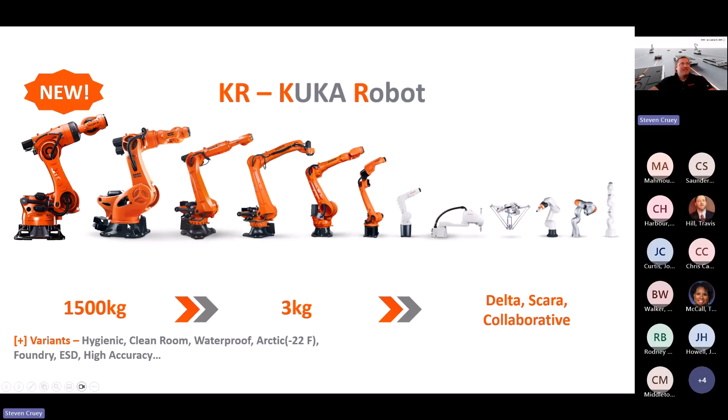And as I mentioned, we got our start with 6-axis robots, and AMRs have just complemented that as well. So we have 6-axis robots that are doing everything from brain surgery to moving cars, right? So there's one for every application.

And I always like to start with the introduction because I think, just industry wide, we've seen AGVs for 30, 40 years. I was watching How It's Made not too long ago, and it was pretty wild to see an AGV going back 40, 50 years, so they've got us up to this point, but that technology has evolved to where we can go fully autonomous.

So think about an AGV as more of like a train. It's on a track, whether it's a magnetic strip or you need optical guidance. I've seen AGVs that had a series of grids with QR codes to read in the ceiling every 4 or 5 feet. So really, on day one with an AGV, you create a maintenance task to have to integrate or maintain that solution.

So it becomes a very rigid, though it is mobile, it's more fixed like a conveyor. With an AMR, what we'll be talking about today, we're talking about autonomous mobile robots. So the same technology you see that automated cars, Tesla uses and other Waymo and other autonomous vehicles use, is the same technology that's on our AMRs.

With that, it gives you a lot of flexibility, a lot more efficiency, and the ability to adapt as you grow or change your facility or workflows. And the integration becomes a lot easier.

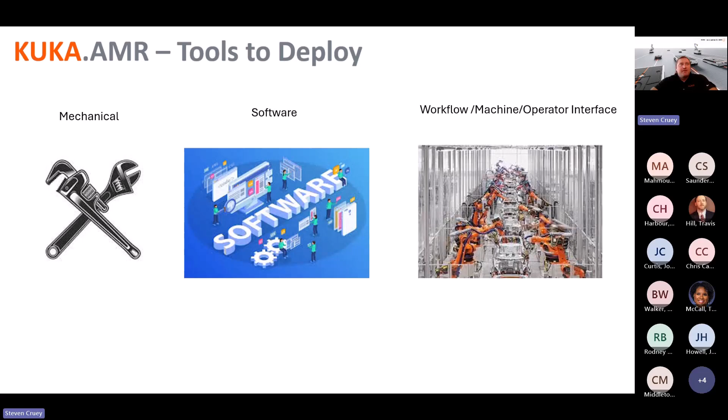So when we talk about the mechanical piece, KUKA has a standard built-in lift top, so it will go underneath and lift up. So it's an integrated lift module. So do we need to consider how we're going to pick up that pallet, or payload, or mechanical rack, right?

Do I need to outfit it with a conveyor? KUKA has power on board, so we can power a roller-driven conveyor. So we think about the ultimate flexibility. A 500-foot conveyor is always going to be 500 feet of conveyor. With an AMR, you can do your 40 by 48 pallet movement with a roller top here.

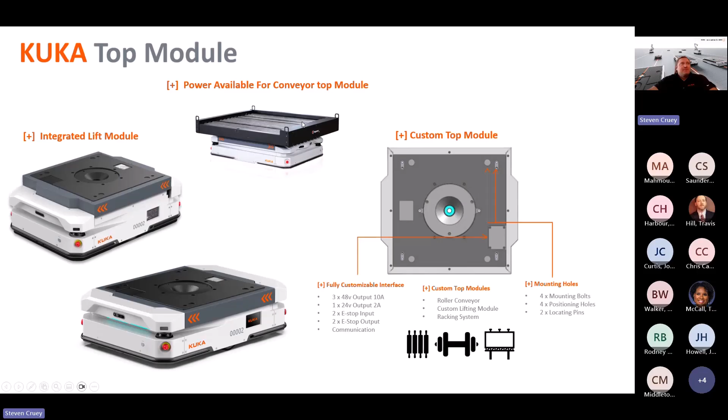Do I need to add RFID? Do I need to add any IoT devices like lights, or I've even seen those ATV whip lights for visibility? We have power on board where you can enable those things. So when we think about the mechanical side, it's how am I going to stage that product to utilize this AMR, go underneath, pick it up, or have a fixed top module where I can lift up and adapt to my flow there, my product there.

So what is an AMR fleet manager, right? I think that's what we really want to define here, what is a fleet manager? What do I need to consider when doing that integration? Because the mechanical part is mechanical, and the AMR physical part is fairly easy. You take a remote control, you drive the AMR around like an RC car, you teach it your map, you teach it your locations, and then what, right?

So really, an AMR fleet manager is a centralized software that acts as the orchestrator to an AMR fleet. Whether it's one AMR or 100 AMRs, it becomes that single source of integration to a workflow, process, or solution. So let's think about it like an air traffic controller.

When I had integrated AGVs, I had to hard code every route and every AGV and handshake. So if I had 100 AGVs, I had to integrate 100 different units. With the AMR, you have a central location like an air traffic controller where I integrate my workflow or my adaptation to my process.

Similar to an air traffic controller, if all planes were taking off and landing and reporting back to air traffic control saying 'I'm taking off now' or 'I'm landing now,' it wouldn't be very scalable. We'd have a lot of chaos. But that air traffic controller helps navigate those landings, helps with takeoffs, helps understand the weather, receiving outside information so the pilots can just focus on doing what they do best.

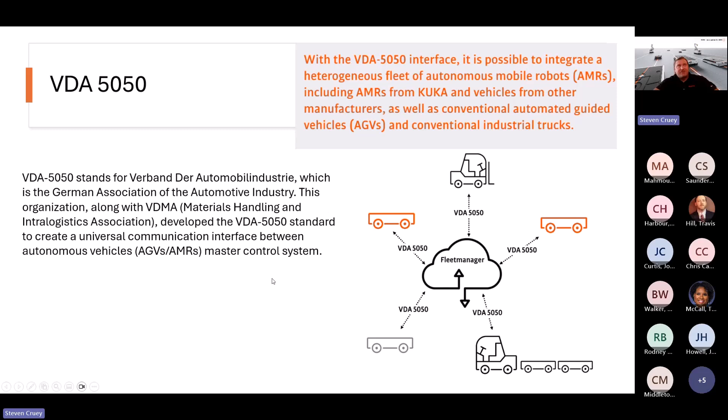But VDA 5050 was kind of created to be that centralized fleet manager. So you would remove, in this case, my fleet manager, and this middleware would be that VDA 5050 solution. So it really helps with traffic management, or if I have multiple AGV or AMR systems, it becomes that one centralized fleet, that master control system. It was the German Association of the Automotive Industry that created it, along with the Material Handling and Intralogistics Association. They developed the VDA 5050 standard to create that universal communication interface between AMRs and AGVs.

So really the goal is to create that true interoperability, so all my devices that are VDA 5050 compliant go to one central fleet manager. But what I'm still seeing in the industry, something to consider is, I still have this centralized fleet manager, but I still might need that middleware software to communicate to other systems. It just depends on the level of integration or version you get, where all the devices can be hosted on the fleet manager.

So this is what the data looks like going back and forth. Essentially, it's an MQTT broker that's receiving JSON messages via MQTT. So orders flow from the fleet manager to the AMR, it's checking the state, and then gives you that visualization within that fleet manager.

So if you don't have any questions, I'll move on to some applications. Covered quite a bit there. Perfect.

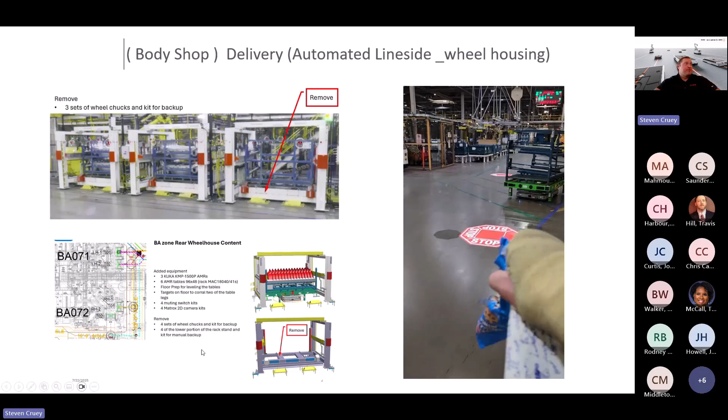6 new racks or these docking stands that it picked up from. There was a little bit of floor prep required, targets on the floor or on the racks to localize off of. And what they were actually able to remove is 4 sets of wheel chucks on the racks, and basically remove these cross braces as well. So sometimes less is more with the AMR.

I have a lot of applications where I'm pulling out a lot of these roller beds or inbound conveyance for the AMR, to make it AMR friendly.

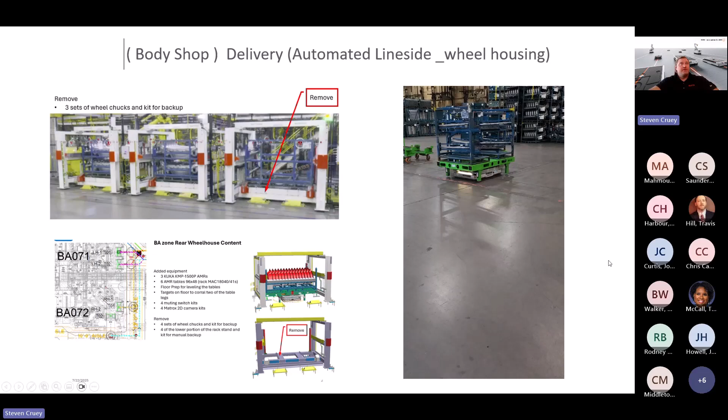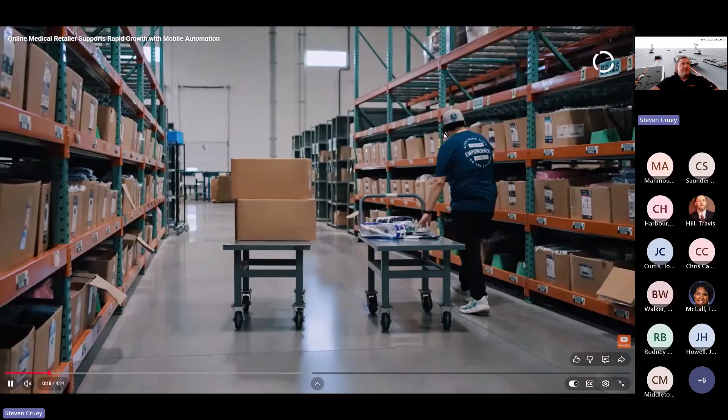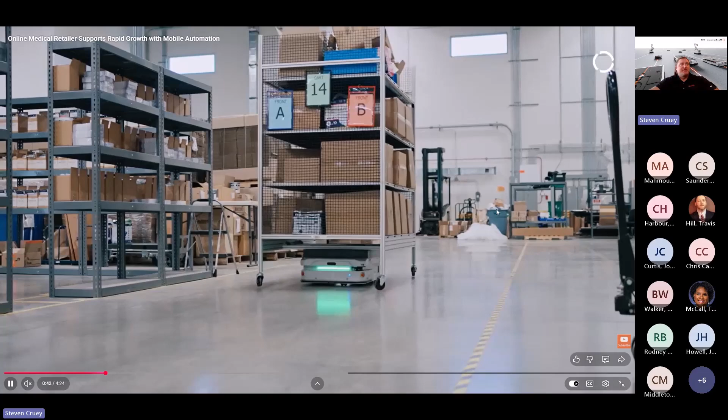So I have essentially a warehouse management system that is managing all these SKUs and all these orders from North Shore's facilities. You have a combination of voice picking and barcode readers, you have your pack out, and then you have rates to hit. So what we're doing here is providing the map, providing our location within that map so it can be exposed to the software, and basically we're receiving orders and a location to go to, so the operator can continuously pick and fulfill this order here.

This is something that a lot of folks have been trying to figure out, and I think really the power in doing this is that centralized fleet manager and being able to expose location.

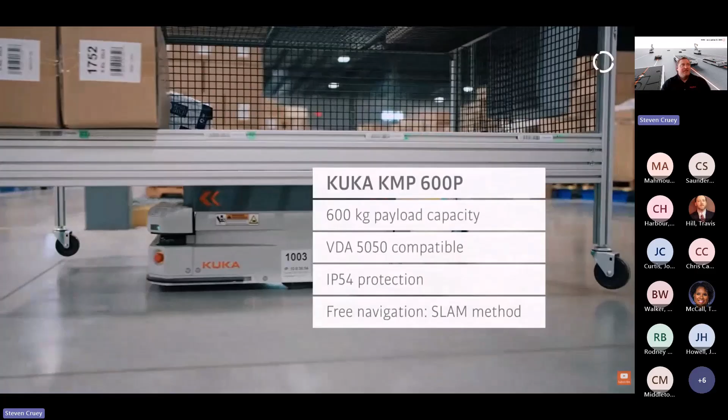So to reiterate here, operators receiving, he has his voice pick solution. So he's telling them, hey, go to location A or B, pick SKU number 1, 2, 3, or 4, this quantity. He's scanning it with his ring barcode scanner, and then that voice is also directing him where to go and what to pick, and he's filling that order there. And then we're moving along, and then we'll take it to pack out.

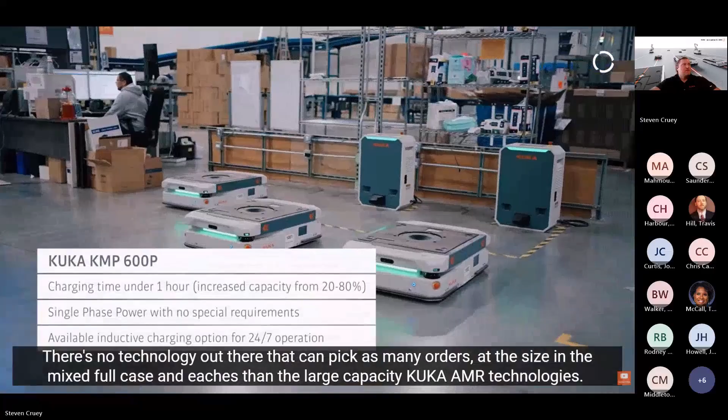So that's your mixed case picking there.

Here's another very unique application, and I think you'll start to see more of this. So robotic loading and unloading with to an AMR.

So we have this 6-axis location, 6-axis cage here. It's picking and placing the materials for this AMR to go pick up in this, I guess, little horseshoe there. So the robotic cell receives the orders, the AMR works in tandem as well to know where to go, where to load, and it starts to fulfill this pallet here.

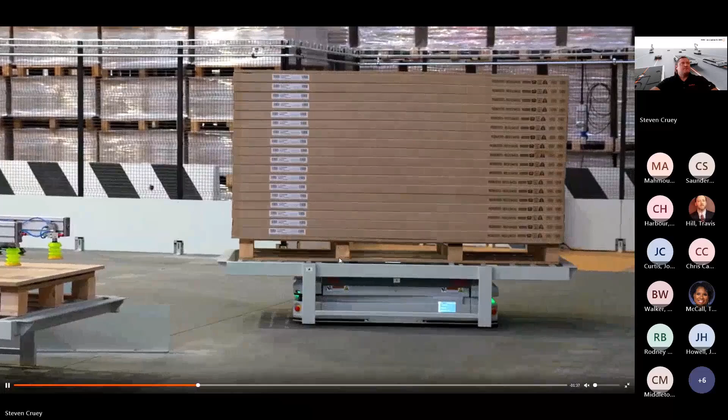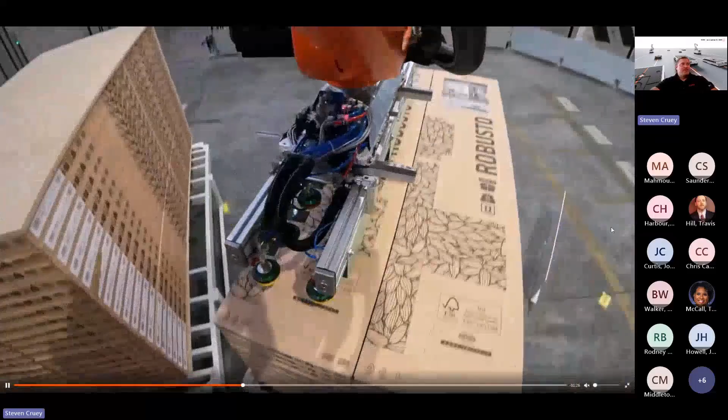So you think about the orchestration of location with the AMR, SKUs, right? So you're managing which items to pick and building out that pallet for that order to go out. But if you think about what this is doing, as opposed to a forklift operator having to go in and stage these and sort these out, or manually loading and unloading these, this is becoming more of that shuttle system to make those quick runs back and forth.

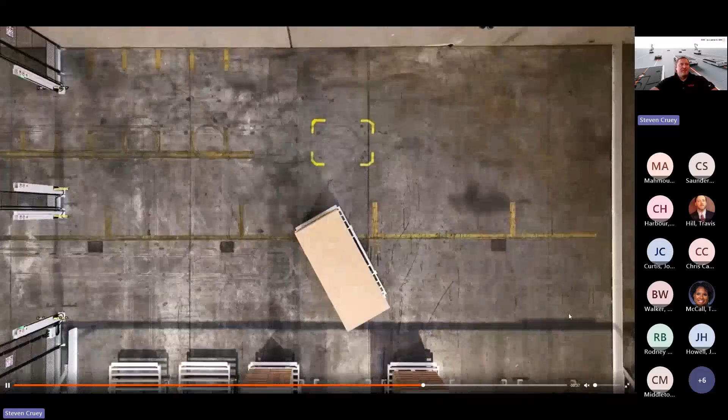We're starting to see a lot more of these concepts, especially when we think about trying to eliminate some of the non-value added tasks, like somebody pushing a cart 5 miles a day, or manually picking up and placing multiple materials all day long. How do we repurpose that operator to do something more beneficial?

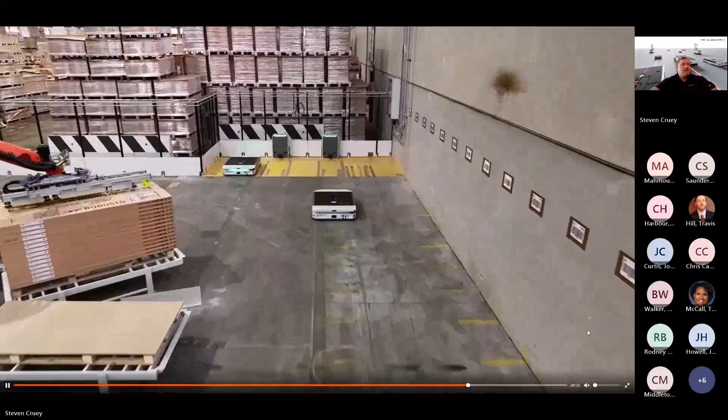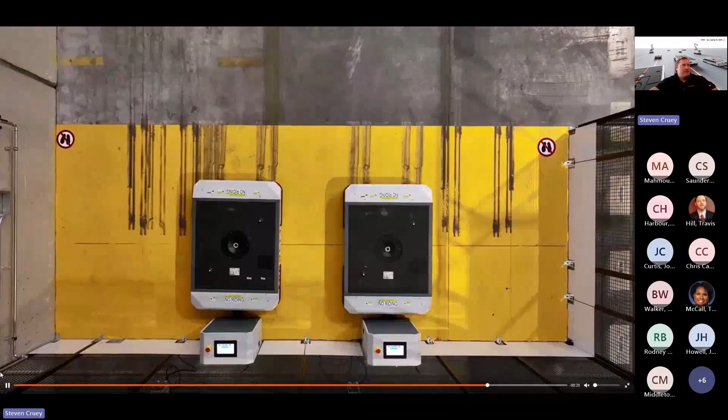And then we have our auto docking charger. I think something to really consider here is, this is a simple 3-prong 110 volt versus AGVs that have more of a flooded lead acid battery. So you're looking at sometimes 1 or 2 batteries that are $20,000-$25,000 versus a $6,000 lithium ion battery, and then a very modular charger. I'm sure we've all seen a battery farm in the back of a facility. So when you think about just the sheer power and energy savings alone, it's something to consider.

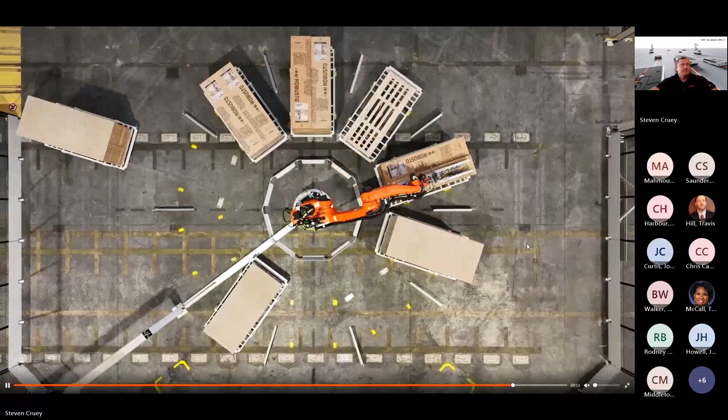And you don't have to manage your charging strategy. It's going to automatically dock. And that's all I have.

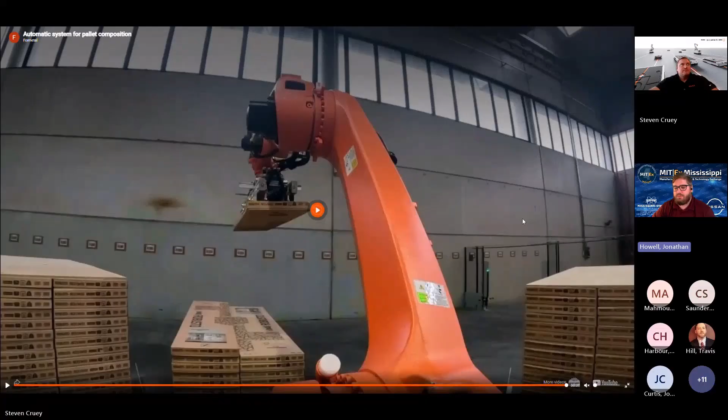And while we're doing that, I got a couple, Steven, just based off some challenges I've had. So you showed earlier the Wi-Fi requirement. I'm guessing it is required to have Wi-Fi in your facility to be able to utilize the fleet manager, which I guess makes sense because you can't have these guys attached to a cord driving around.

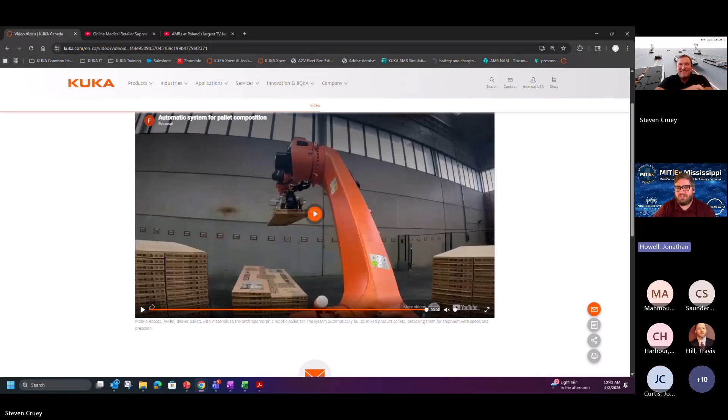Yeah. But I have a question about that. What happens if one of your units loses their Wi-Fi connectivity? Does it stop, or is it able to continue and gain it back?

So the AMR, our fleet manager is designed to complete that mission and get to a safe stopping point. So if a mission is triggered, this AMR needs to go pick up this pallet, take it from location A to location B, and drop it, and that's the completion of the mission that's set up in the system. It's going to fulfill that mission, then stop. It's not going to stop just because it loses Wi-Fi en route.

Okay, so it actually completes the mission and then gets to a safe spot to go into a holding pattern. Does it have to be manually recovered after that, or if it gains Wi-Fi back, will it auto recover? It will auto recover and pick up where you're left off.

Something to consider is, because I've seen this a lot of times, if you're staging, I wouldn't stage more than 5 to 10 missions in a fleet manager, depending on how, basically what I mean is you have SAP or warehouse management system sending triggers, and they need to be within a certain order. The more you put on the fleet manager, the more you have to backtrack on if you lose Wi-Fi or lose signal, right? It will pick up and follow orders, pick up where it's left off. But if you need to handle an exception, you don't want to dump 1,000 orders or missions into the fleet manager, right? So just something to consider.

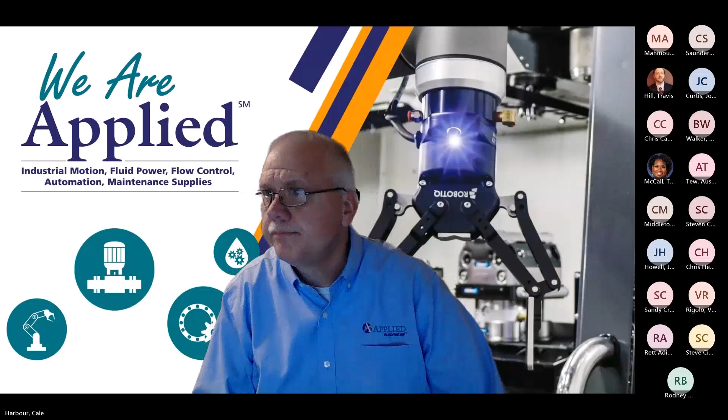So I'm part of the Applied Automation Group. ACS is one of the 6 automation distributors that make up this group. We are based out of Marietta, Georgia, and cover 8 states in the Southeast. So we've been expanding very nicely lately, and I'm glad to get a chance to talk to everyone here this morning. Specifically, what we're going to be going into is mobile Cobot integration, actually interfacing a standard 6-axis collaborative robot arm onto a mobile platform, an AMR platform, to be able to accomplish new things in a manufacturing environment we haven't been able to do before.

So that being said, before we get into it, I just kind of wanted to hit a reminder of what are some of the benefits of automation? Why do we care about automation? What is it that automation gives us? And some of these things are going to be a repeat.

The first thing that everybody typically thinks of is labor savings. If you automate a process, you free up that human labor to be able to do something else. Repeatability - you have automation set up to be able to do the same thing every time. Same process, same assembly, same force to be able to press something together, the same surface finish. It's set up to be able to produce or perform or service the same process repeatedly, over and over again, the same way, to the same standard.

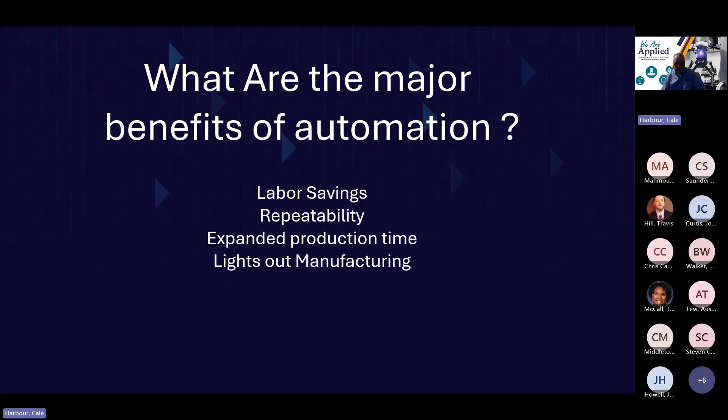We do have a customer - they have a series of machines that we're tending. They set it up with a batch of parts and go home at night. And when they come in the morning, the batch of parts are done, and they've achieved an extra 6 hours production on 6 machines without having to put any extra staff on board. So that ability to expand your production time and be able to run that lights out when no one's there is a real benefit that comes from being able to automate a process.

But because we have that repeatability that I mentioned earlier, it also enables us to reduce the scrap rather than having an inconsistency that a non-automated system might bring into it. We're doing that same thing every time. We can reduce that scrap.

We can reduce the rework. We can reduce the material that may not be able to meet quality standards, and therefore we get more product through in a shorter time with less effort.

But one of the huge important things that gets overlooked is this reallocation of human assets. We've seen this time and time again. When we can deploy automation, specifically with robotics, that ability to reallocate that human asset to something that brings more value and more return to your manufacturing environment - when that can be done, the ROI, the payback, the benefits far outweigh what the labor savings are. That ability to add to the capacity.

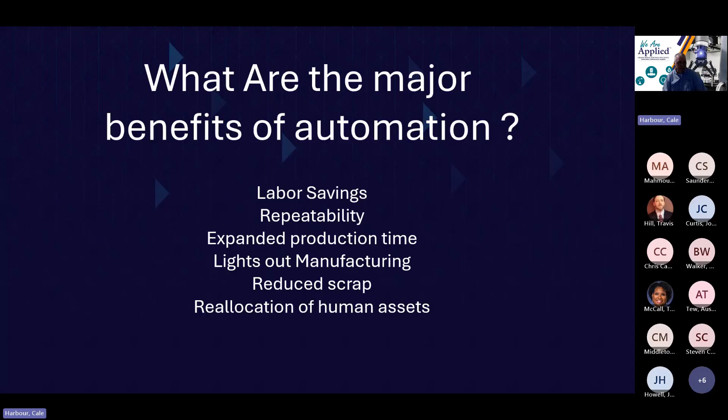That's part of the unexpected benefits of automation, the things that happen that you don't really think of or expect. It's not something that's typically predicted on a spreadsheet or an ROI calculation, but improving worker retention and morale by being able to redeploy that human asset to something that brings more value to the customer, to the employee, and to the company itself.

One example we did, this happens to be a collaborative 6-axis arm made by Universal Robots. This is an application at a life test lab. With this one, that person's job, 40 hours a week, was to raise the blind, lower the blind, open and close. And every 30 cycles, 50 cycles, they had to record, does it feel the same?

Is it getting looser? Is it getting tighter? So they're giving their human perception to how this particular blind is feeling over that test.

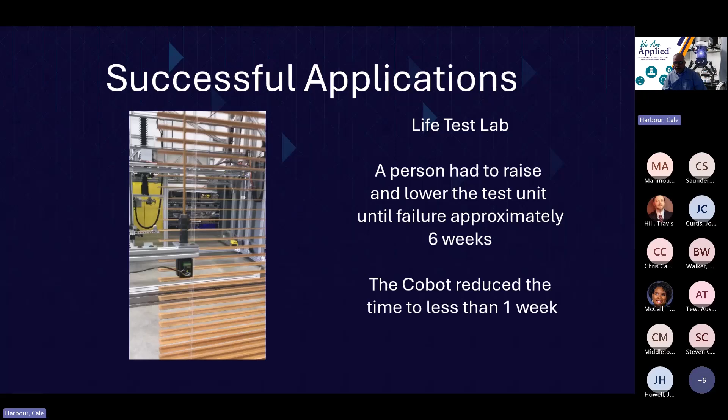And they have to do that until the blind fails. So this is usually about a 6-week test period. That person's job, 40 hours a week, 8 hours a day, is to just perform this motion - raise it, lower it, open, close - and every 50 cycles or so record whether it's changing or not. Well, that human perspective on whether it's changing is not very empirical.

And needless to say, they had a very high turnover rate in this job position. One of the benefits we had when we deployed this arm with this customer was that the employee working at this station had a high school degree, did not attend college, was not a degreed engineer, but we worked with them and trained them on how to use this technology. That employee, who showed up for work, was reliable, someone they wanted to keep, got promoted to be the robot technician.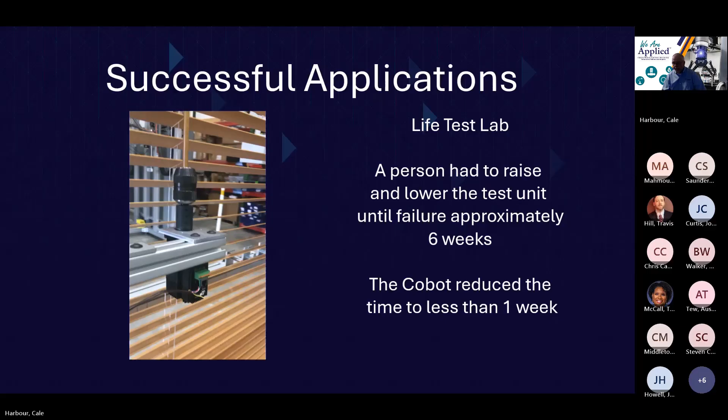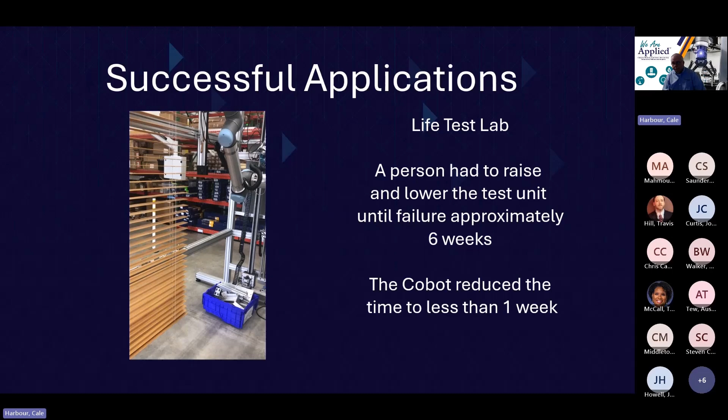They got a pay raise. They were able to retain that employee, which means they didn't have to go through rehire and training. With this technology in place, it could run 24 hours a day, through lunches, overnight, and because of the force sensors in it, they were able to get real-world data on the actual amount of torque it was taking to raise and lower this blind, which they could do more specific analysis with.

One of the other things that happened is they could now complete an entire test in 3 or 4 days. They were able to get 6 to 8 units tested in the same period of time that it took for one previously. They then added a second robot, and that one person was able to be the robot technician for both cells, setting up from one test to the next.

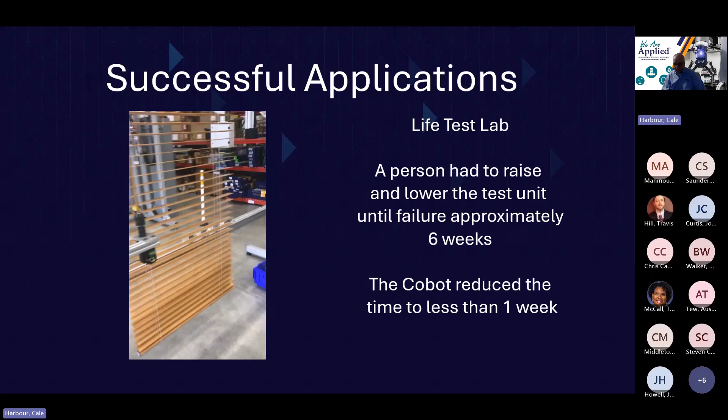Keeping that employee, someone who showed up when they were supposed to, and being able to achieve the cycle test that much faster far outweighed all the other benefits they got out of this. But in addition, they also got better data coming out of it.

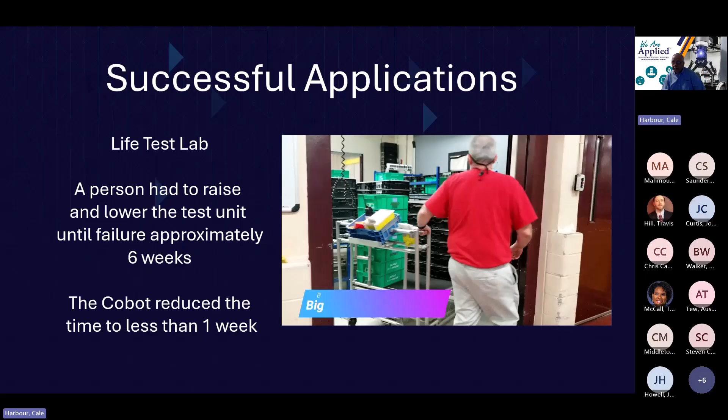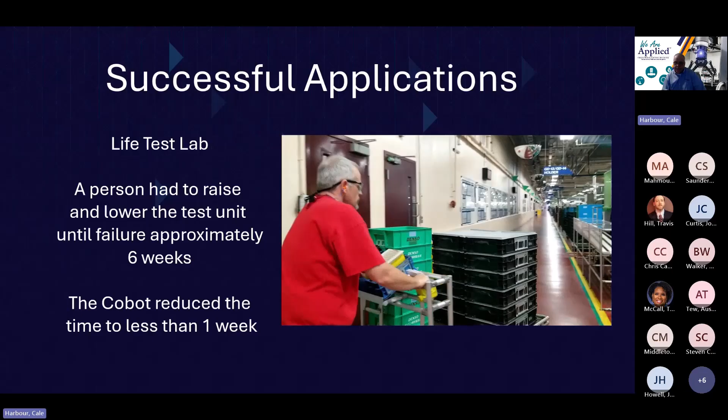Another scenario we did, this was a different customer, involving a mobile robot platform - we're working with Mobile Industrial Robots. This is another area we had where, in this particular case, they had a team of people on every shift, 3 shifts a day, anywhere between 8 to 12, that were walking 8 to 10 miles a day just to deliver material line side.

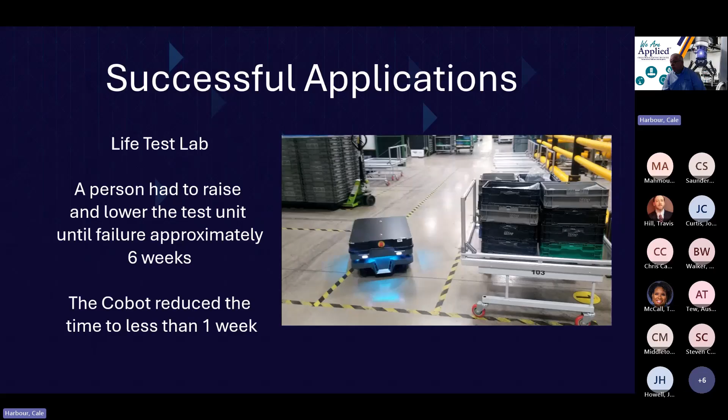We were able to work with them and add an IoT appliance, that middleware between their MES warehouse software system and the mobile robot fleet, to work with the lines so that when they called for material, we knew where the parts were staged and were able to engage those carts and deliver the parts to the production line.

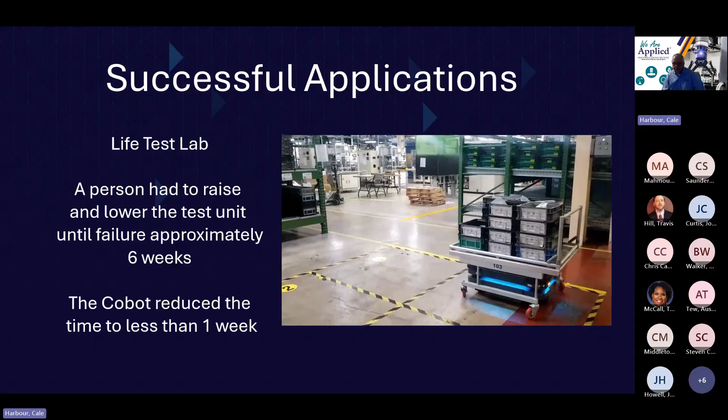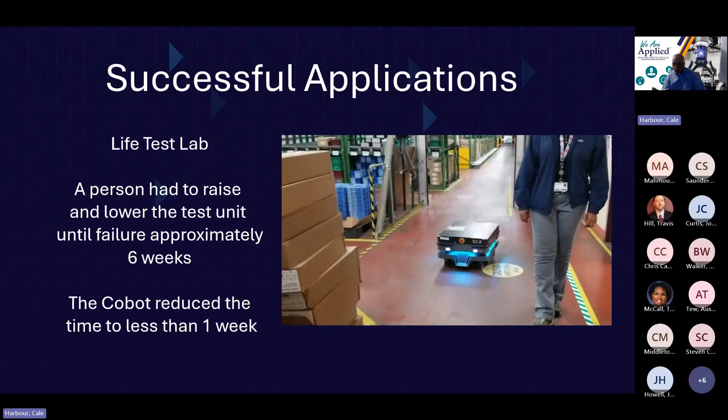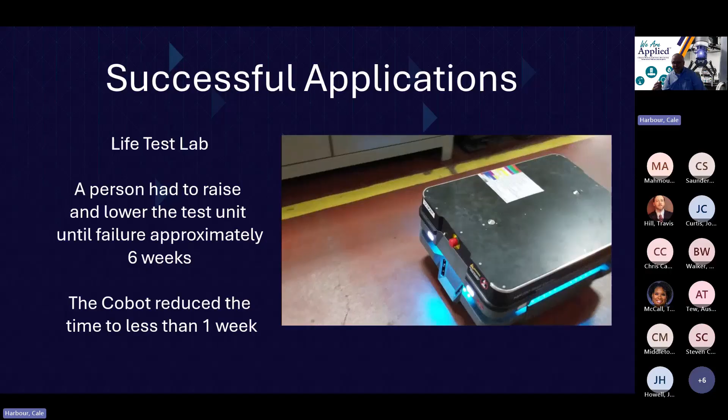In this particular case, we freed up between 8 to 12 people per shift, 3 shifts a day, to perform higher level tasks, things that human beings could do better than just pushing a cart around. We're able to deploy it in a safe environment to deal with obstacles, move around barriers, and notice where people are so it can get around safely and still accomplish its mission to keep the parts fed to the production line.

So with these 2 technologies, these are 2 great case stories about how we were really able to add not only the value that it brought to the production line, but those unexpected values of reallocating that human asset to do something higher level, to do something that brought additional value.

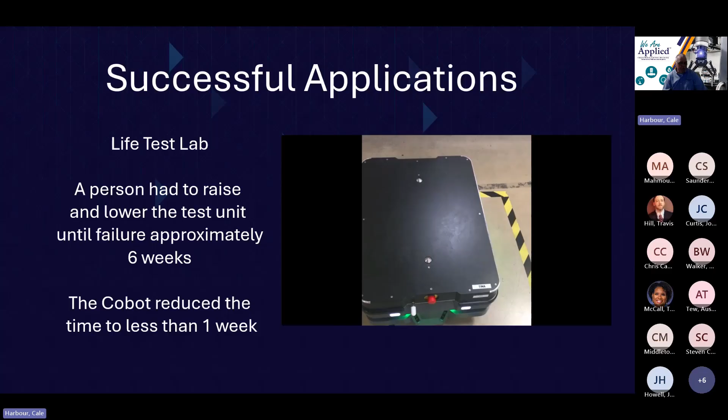But what happens when you combine those technologies together into a mobile cobot platform? In this scenario, this is that 6-axis collaborative arm on top of an AMR, which is also collaborative, able to sense the things around it and be safe in its environment around people, and put them together to solve a task or a mission or a set of needs that's on the manufacturing floor.

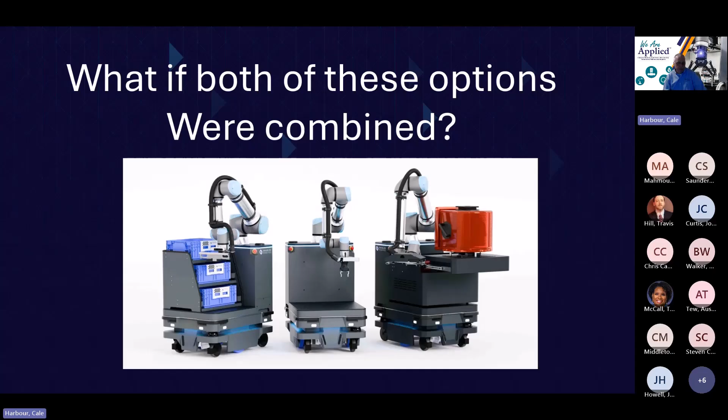Now, what exactly is a mobile cobot? A mobile cobot is combined of 3 different pieces. One is the actual collaborative arm, in this case a Universal Robot, and an AMR, a Mobile Industrial Robot, but we combine it together with a platform that ties the two together.

And when I mention the word we tie them together, it's more than just the mechanical connections. In addition to that, the software is also combined so that all of the commands for the 6-axis arm and all of the commands for the mobile platform are in one common, easy to use interface.

We're still able to talk to the fleet software. We're still able to talk to the middleware to give us access into the SAP system, ERP, warehouse management system. But it makes it simpler and easier to deploy by having just the one interface to work with and combine these together.

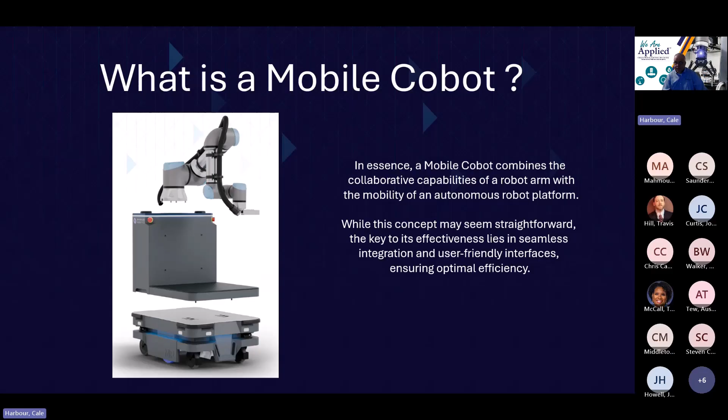So what can you do with a mobile cobot? Again, they can run 24 hours a day. They can run through no lunch breaks, no putting on of PPE, no PPE purchases for it. It's able to just run.

Once it's programmed, you don't have to do additional training. It's going to provide that repeatability to do the same process every time. Now, we can make the mission with the right decisions, the right statements to choose - if this is not ready, then do that type of scenario - but it's going to do it repeatedly, reliably, and predictably.

With this, we're able to communicate with all of the existing equipment on the floor, either directly or through a middleware setup. And we can provide those logs to say how many missions did we complete, how many parts did we deliver.

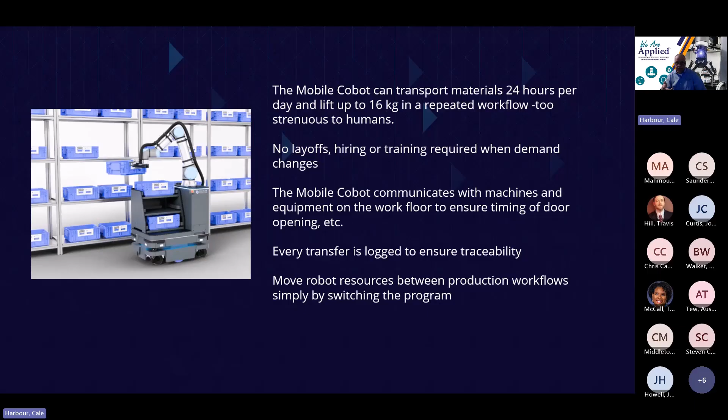In the case of this particular scenario that we have here, we have a particular cobot with shelves on it, picking up bins of parts to take to the warehouse to get refilled, or to bring parts to the line and put it on a particular workstation.

This environment can also, because of the flexibility, if we're not dealing with a set of shelves, we're putting things into the rack of the machine to keep it fed. We're able to do that as well.

But we're able to work in the environment because of the mapping and the localization that we have. Most environments require just minimal modifications for us to be able to work in, and we'll get into some of those examples here in just a second.

But this is also a technology that can be gradually phased in. If there's a potential to do 10 of these in an area, it's not an all or nothing scenario. We can start with one, get it in place, get the employees on the floor familiar with the technology of seeing it run around, work out the details of the communications, and then expand as you go.

So as your workflows change, you're able to easily adapt that. Again, through the fleet interface, we can make that change and have it go to all robots simultaneously. So if a workflow or work path does change, we're able to easily adapt to it and be less sensitive to those changes.

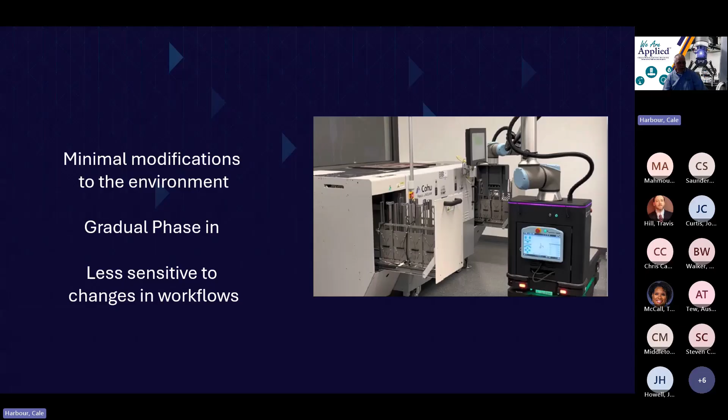Just as a quick reminder, what is the difference in an AMR? An AMR is an autonomous mobile robot. In the last 30, 40 years, we've seen AGV technology. AGV typically follows a magnetic rail, a wire embedded in the floor, or could be QR codes in the ceiling, but it provides something that it has to interact with to follow a path. And if something blocks that path, it's not able to go around it. It has to follow its line.

But when we take this AMR technology and add it to a 6-axis arm to turn it into a mobile cobot, there's some additional things we have to consider, and they're fairly basic, they're straightforward. When we add that 6-axis arm and combine it with this platform, what's the reach we need to achieve? Can we reach from the lowest point to the highest point that we need to be able to achieve the mission, to achieve the task at hand?

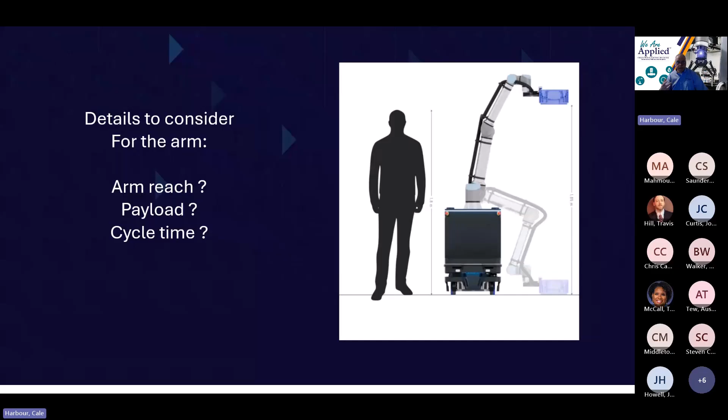As the robot is moving, it's keeping safety first above everything else. Now, obviously, we can work with the speeds, we can optimize it, but as obstacles come in the way, as pedestrians get in front of it, or a box were to fall off and get left in the aisle that we have to navigate around, all that takes time. So we have to know what the cycle time for an application is to make sure we can achieve what we need to, or do we need more than one robot to be able to achieve it? So those are some of the basic things that we need to consider for the arm.

For the AMR, things such as the aisle width. Is the aisleway wide enough to allow the robot to move down it? Or if we need multiple robots, can two pass each other to get from the warehouse to the workstation, for example? How are we going to start the mission?

We're going to talk about this in another slide in a moment, but think about how you want the operator to interface with this system. Is it a push button? Is it an automatic call from a PLC? Is it going to be a custom dashboard? We'll get into that momentarily.

The fleet management, being able to keep up with multiple AMRs within a facility and be able to manage them for emergency egress, charging stations, map sharing, mission allocation. All of that still has to happen, and we have to consider how we want that to behave as we're deploying.

The traffic flow - this is one I think sometimes can get overlooked. When we began working with this technology almost 10 years ago, we had customers misunderstand what collaborative means. Collaborative on the AMR and the arm itself, we are capable, provided the risk assessment is done and the application meets the requirements, of working next to human beings without a problem.

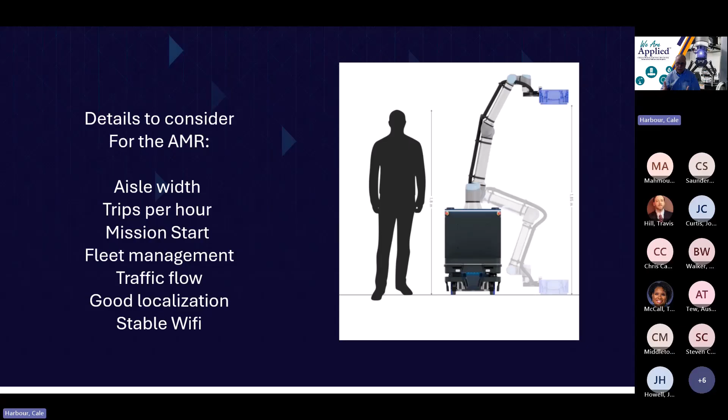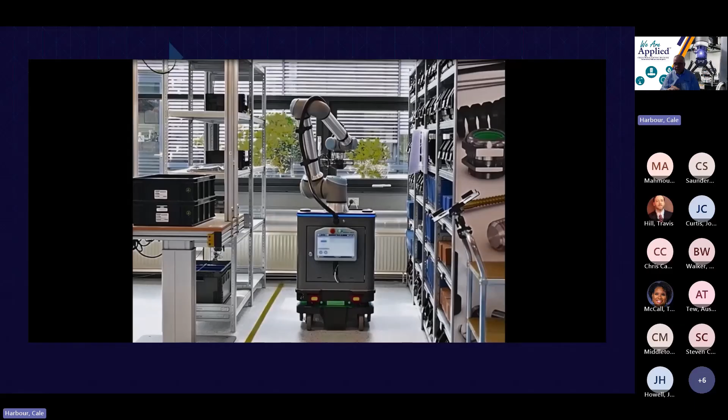That being said, let's look at an example of what this might look like. So this is one of the smaller platforms. On the end of the arm, there is a 3D camera. That 3D camera is looking at a chessboard grid that is attached to, in this case, the tote itself.

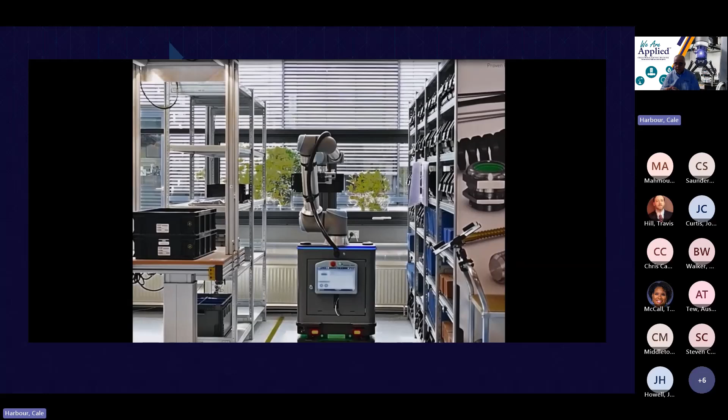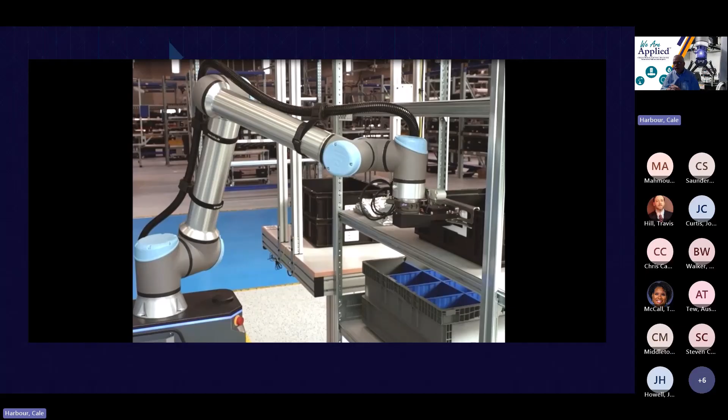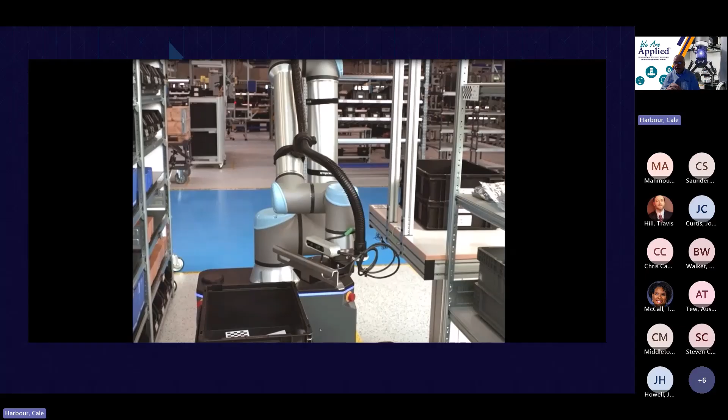And why that's there is when that tote gets placed on the shelf, it does not have to be placed precisely with dowel pins or precision datums or things like that. The camera is able to take a picture of that grid and be able to adapt for an angle difference within the tote itself or the position of where it's at and adjust the coordinates of the robot accordingly.

So in this particular case, the robot's come up. It's looked to the shelves for the empty bins. It has retrieved the empty bins next to this workstation, and it's now going to take them back to the inventory area to be refilled and then bring them back to the area.

So this is one where if we have that human being at that particular workstation and they're doing the assembly, we can keep the parts fed to them without having someone push a cart over every time or just walk back and forth from that warehouse area, just not really adding value to what's being made.

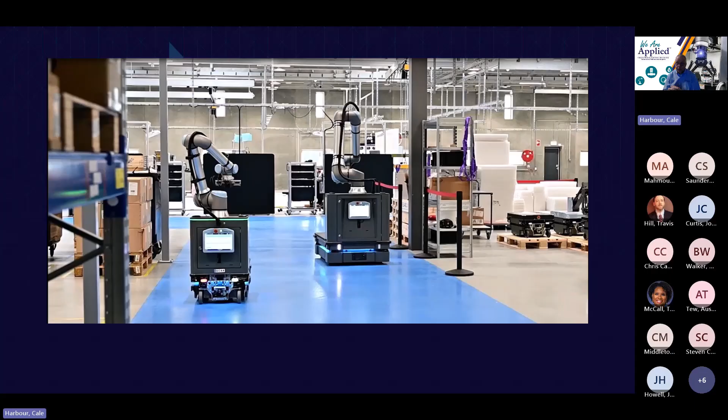Now, mobile cobots, though, can come in multiple sizes. The previous video showed the one on the left, which was the smaller platform. The larger platforms, we can go much higher payloads and much longer reaches with the 6-axis arms we're able to put on top of it.

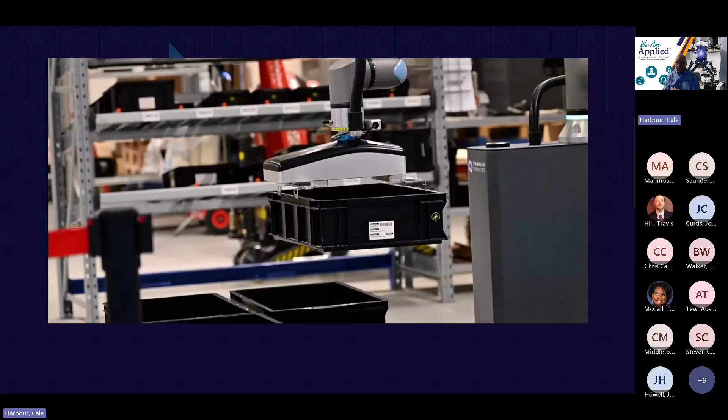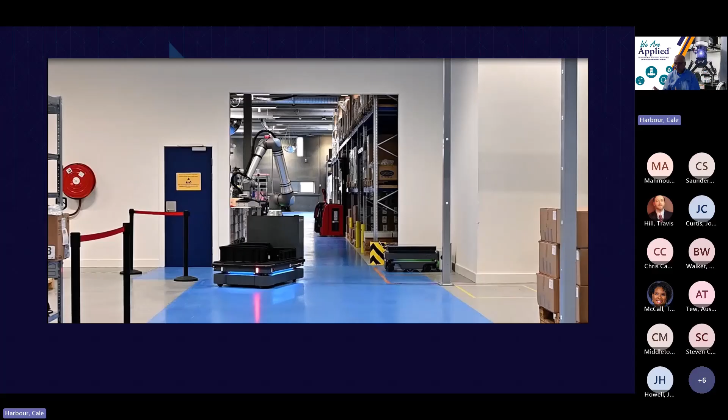So in this particular scenario, we've got larger totes that we're dealing with. Again, able to pick them up, be able to grab either the empties or the full, load them onto the platform, and then be able to carry them to where they need to go, whether it's back to the warehouse to get refilled or it's the production line to bring those filled units to the line for the operators to be able to work with it.

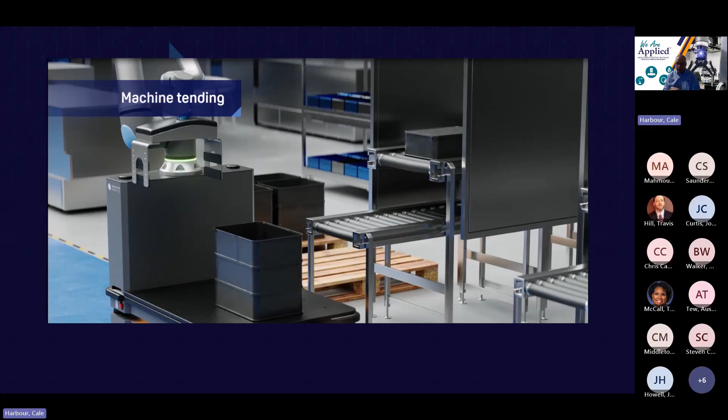Now, this particular scenario is showing a machine tending setup. So here we're delivering bins to an in-feed conveyor. These are the empties, so we're feeding those empties into it to be able to get filled at the machine itself. And then we're going to pick up the full ones coming out the outfeed conveyor and carry them to the warehouse. Pick up another set of empties and we'll come right back and keep it full.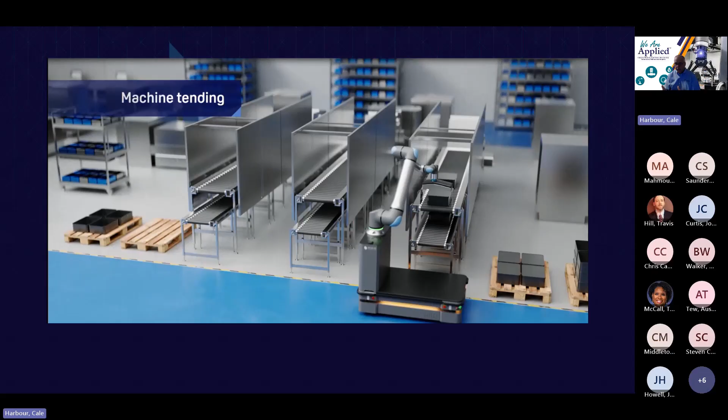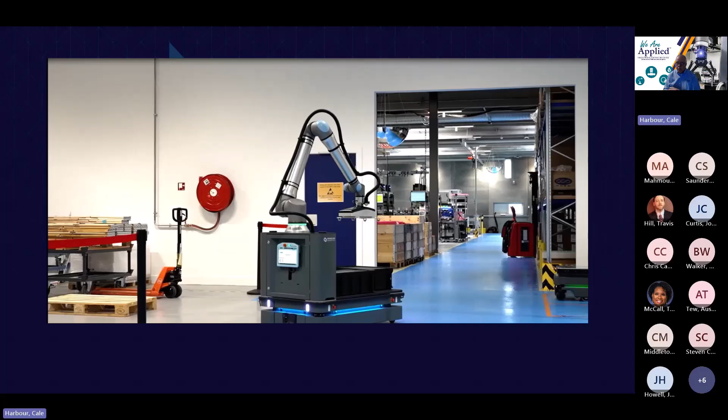So in this particular scenario, we're having the unit be able to service multiple machining centers, be able to palletize the load, and then keep the line fed with parts. As those parts get full, it's able to bring it back out to the line, place it where it needs to go to be able to keep production moving.

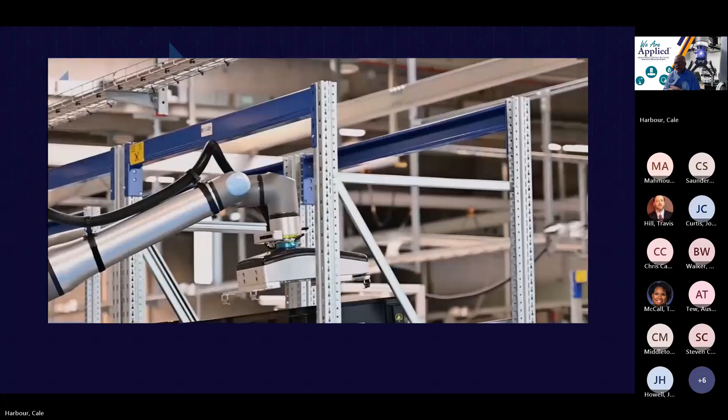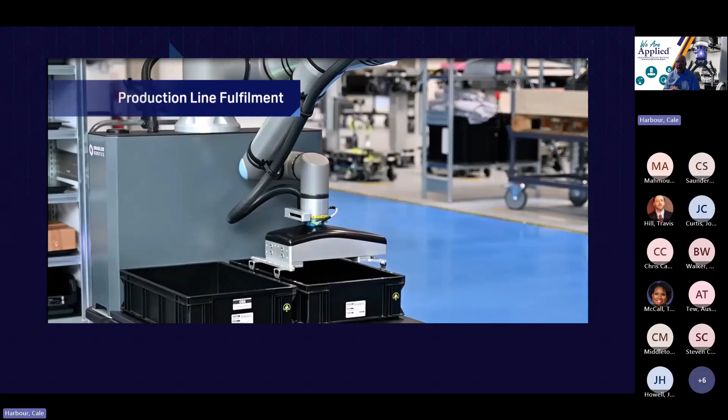Another scenario, we're interfacing with gravity feed shelving in this particular case. So being able to deliver those totes, again, whether full or empty, to that gravity feed to keep that operator station up and running, complete with parts or complete with empties to be able to put finished parts into and be able to keep it tending.

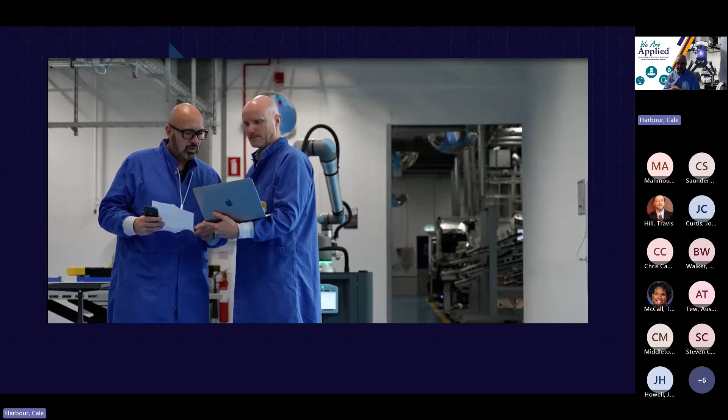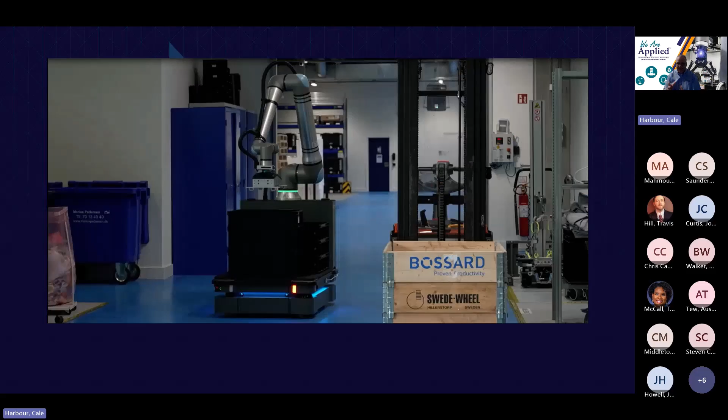So again, that larger platform, that larger arm, we're able to reach farther, carry our heavy loads, but still maintain the safety standards that we need in order to deal with obstacles, people within the environment, or things maybe even getting left in the aisleway to be able to get around safely and accomplish the mission.

One thing to keep in mind is that within this platform, the fleet manager is able to manage all of the different size robots, whether it's the small ones, the large ones, dedicated AMRs without a mobile cobot on top, or even the pallet jack that we have to be able to move full pallets on point-to-point moves from floor to floor. All of that is managed by the same fleet environment and can share the same resources.

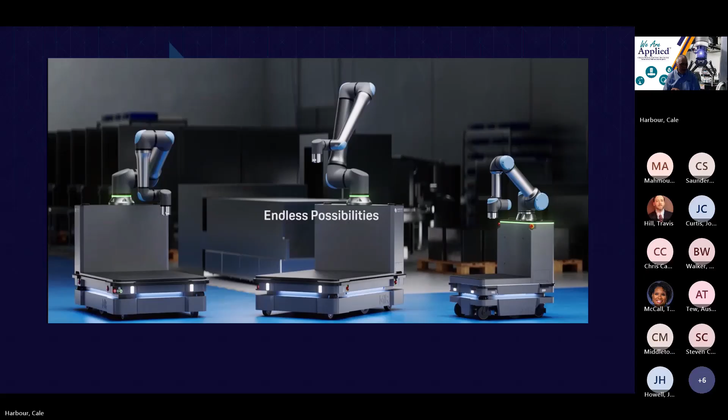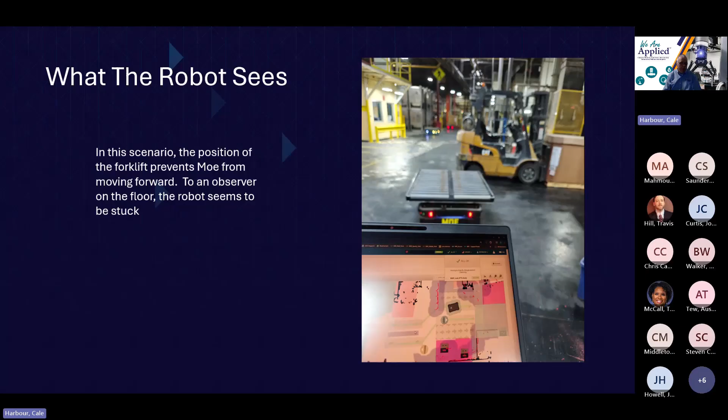So if we take a closer look at the map itself, now we can see what's going on. Again, that red data from the live sensors that you see in the middle of the screen, that's the fork truck. It is parked in an unusual spot. It's not supposed to be there. The purple haze around it is the safety zone. And if you look towards the bottom center, you'll see the arrows. This is a zone that was set up known as a one-way zone, meaning it only allows one-way traffic going, in this case, from left to right. There's not enough room between the safety zone around the fork truck and the one-way zone that we've declared. And just like in the real world, you're not allowed to drive the wrong way up a one-way street.

So in this particular case, there was not a safe path for the robot to complete its mission. So it stopped. It's continuing to try to get around it. And then it sent an email notification out to say, I'm in trouble, I need someone to come look at me. In this case, the champion who was on site at the facility was able to look at the map, and now they can make a decision.

Do they enact signage or training for the fork truck drivers not to park there? Or do we need to look at changing the one-way zone to give it more room to get around it if that's something that they need to do? Now, changing the one-way zone might affect other things within the mission. Having it set up where the fork truck can't park there could also have other effects. But now we know exactly what we need to address and what decision needs to be made in order to optimize this map and this installation to achieve its efficiency.

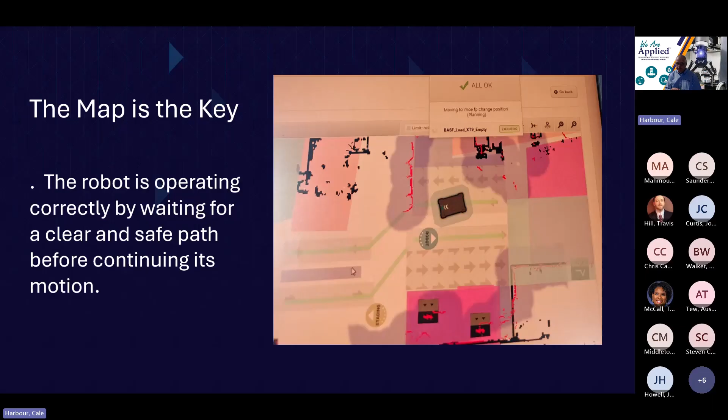As we look at deploying a mobile cobot into a facility, one of the things that has to be thought about is the controls. How are you going to interact with the robots to call a mission, interact with the operators, etc.? One way is a custom dashboard set up on the fleet with a series of buttons: pick up, drop off, deliver to warehouse. At that station where the operator is, at that piece of equipment, what missions do they need access to? Might be just one button, might be two or three. Anything with a web browser can access this custom dashboard on the fleet and enter missions into the queue to execute.

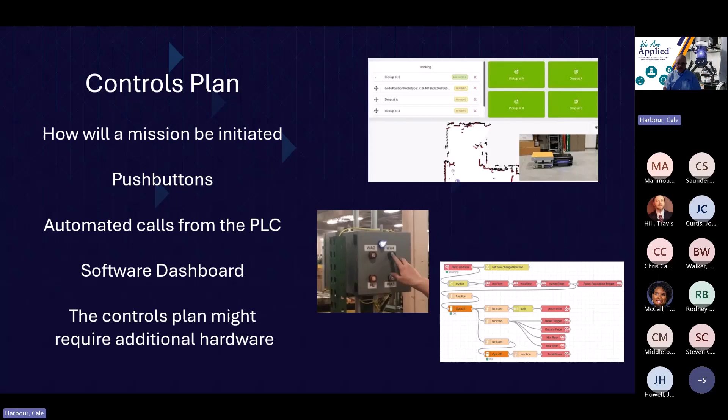Now, I mentioned several things to help with the deployment of this technology in the field. One other resource I'd recommend is a book written by Samuel Bouchard, CEO of Robotiq. They are a strong provider of solutions for mobile cobots, for universal robots, end-of-arm tooling and solutions. He has written a book called Lean Robotics. It's available from various sources, you should be able to find it online without a problem, and it's available in both print and audiobook format.

What this book does is walk you step by step through the process of deploying an automated work cell, the questions you need to have answered, things you need to think about and consider, and how to get a champion set up to help drive that solution and drive the success of the automation project. Sam's done a nice job with this, so if you're looking at a new deployment or a new setup for automation, I'd highly recommend getting this book. It's centered around 6-axis robots, but in my opinion it applies to all automation projects. I'd highly recommend checking it out.